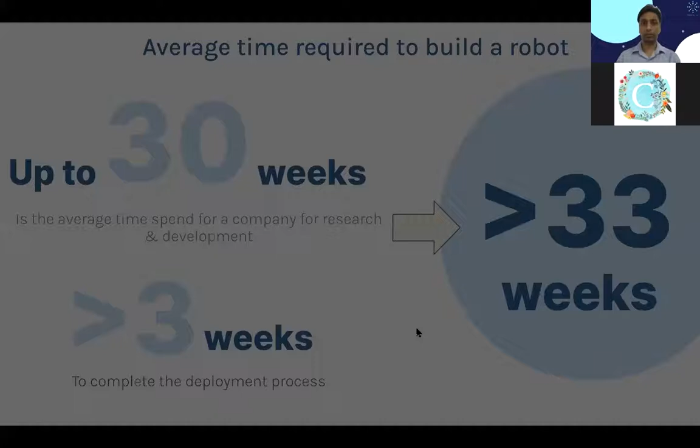Because of this, the adoption of robots by end users is quite low. So we analyzed what challenges these end users or robotic companies are facing, and why the

end users are reluctant to use robots. First, it's high downtime, which means when robotic companies go to the customer site to deploy these robots, they take up a lot of time doing the deployment or integration at the site, and their machines might be off. They might be in the middle of changing from manual to autonomous automation, and that takes a lot of time. Second is the cost of robots.

These days, service robots or industrial robots cost a quite significant amount initially, which is something a lot of companies are not willing to spend upfront.

Then, end users have difficulties operating these robots because the environment might change. They might have to call the robotic engineers to do the mapping again, to move the robot around again to build a new map. This again causes them a lot of trouble, because if the map has changed, they cannot use those robots during that time.

Then there are non-technical operators who, even if you give them training on how to do the mapping, are not able to use that. So suppose a janitor wants to use a robot for cleaning - their requirement would just be to press a button like start or stop, and the robot should do the task. So it has to be very friendly for them to use the system.

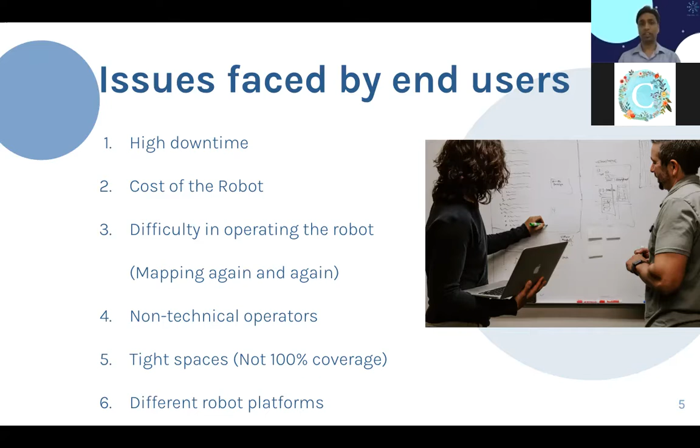Now, how do we address the issues which we just mentioned?

In order to reduce your downtime, make sure everything is tested in house, which means the team would have to spend a lot of time doing the testing in house. Even if your customer environment is different, make sure you are able to recreate some of that environment in your lab or office, so that you can do the testing there. That is one solution which one of the companies we know has adopted.

Then, instead of doing upfront selling, a lot of companies have adopted a monthly subscription cost. They have divided the cost of the robot into 24 months, and the customers have to pay for each month rather than paying it upfront. This removes the barrier to entry for a lot of robotic companies. This is something you guys can try as well.

Third is a user interface - robotic companies giving a user interface to the end users. End users can simply use this to control the robot, to do the mapping from the UI itself, or they can even have this UI for start and stop for non-technical operators. If you are doing these things, the barrier to entry would be reduced drastically.

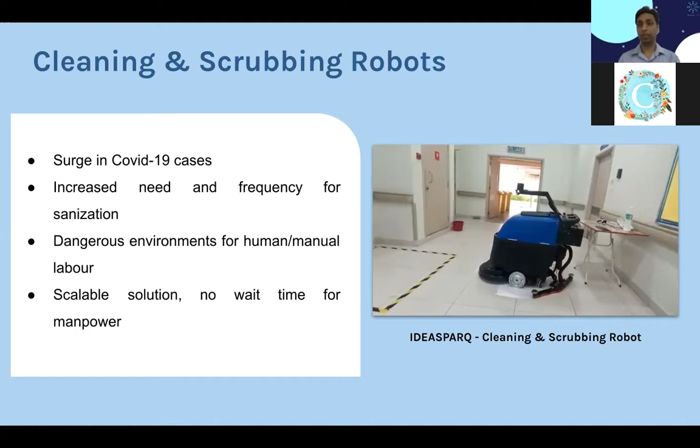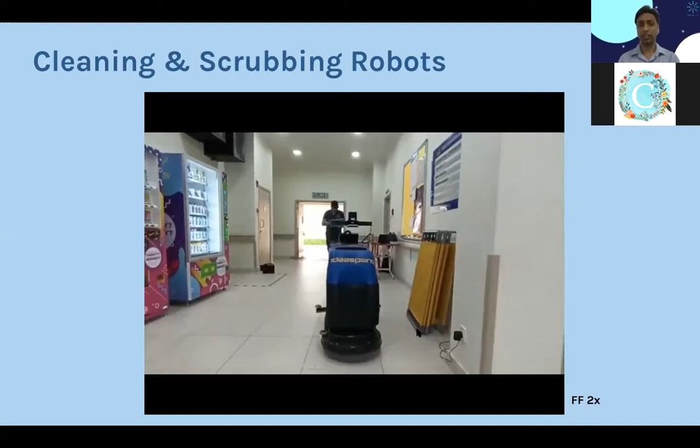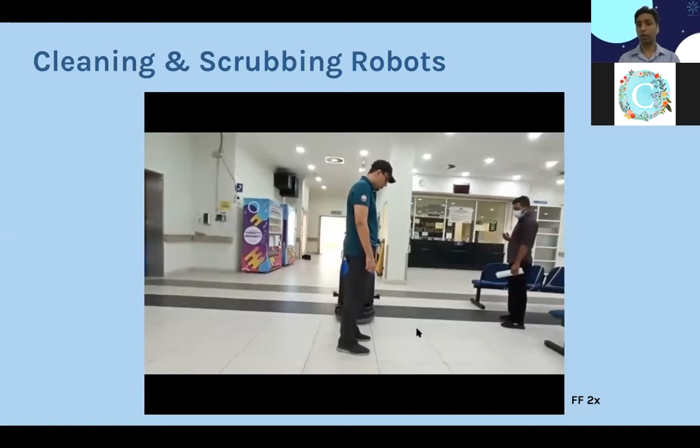The company gave their customer a very good user interface, and the downtime was very low because instead of 3 weeks, they were able to deploy these robots in 3 days. That speaks to why customers are more interested in buying their robots. This company is based in Kuala Lumpur, IDEASPARQ, and even if there are obstacles, the robot can avoid them autonomously and move around.

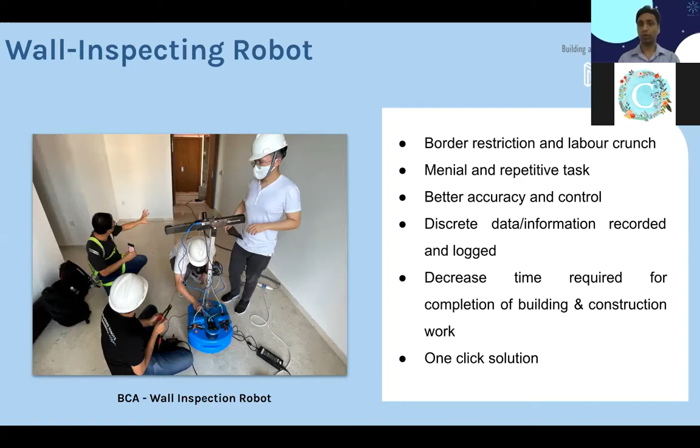Our next use case is for the BCA, the Building and Construction Authority of Singapore. They do inspection of a lot of sites once they have been completed. Because of restrictions, people couldn't go to the sites to inspect houses that had been completed, so they asked for a robot. These inspecting officers are not technical people at all - they just want a robot where you press a button, it starts, and it goes around the house.

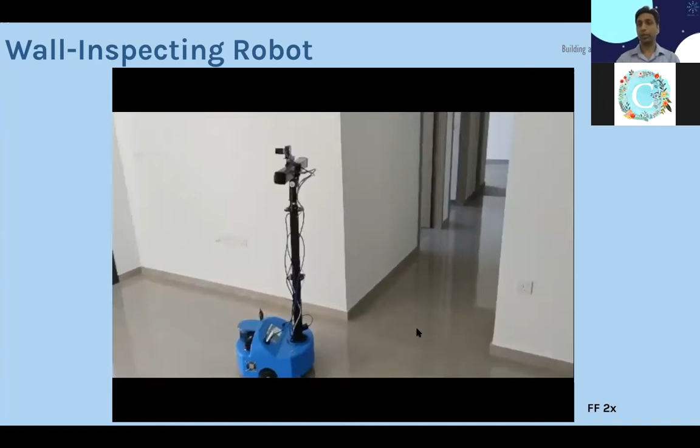It does the mapping by itself, and once the map of the house is built, you press a button called 'start inspection', and it starts inspecting the house. Once the inspection is finished, the inspecting officer can press a button saying 'generate report', and it will generate a report. This saves a huge amount of time - instead of having multiple inspecting officers visiting sites, you can have robots doing these things.

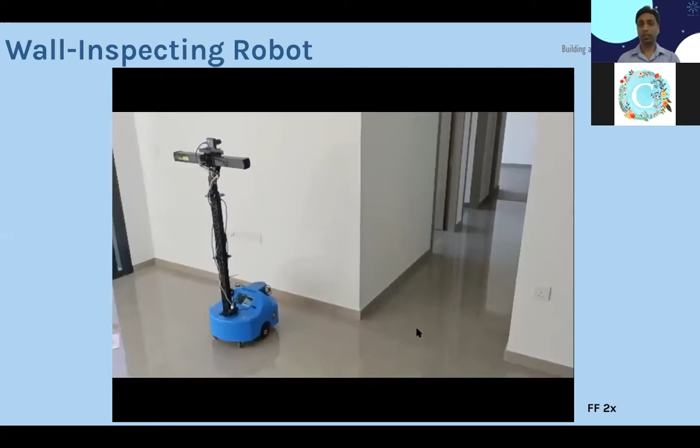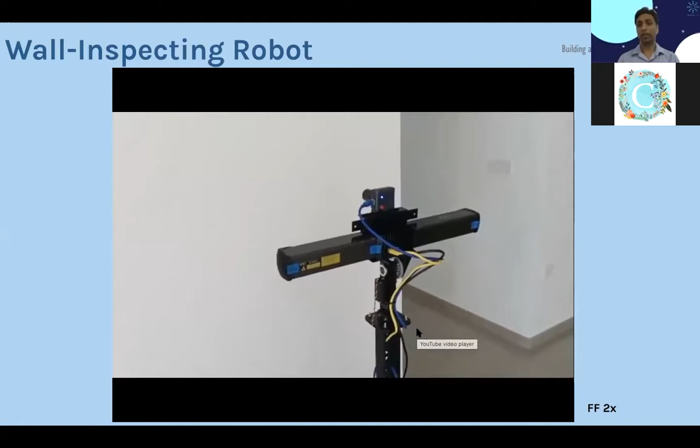The reason why the end user, BCA, adopted this solution was because it was so easy to use, with just a start and stop button. The barrier to market was reduced because of this simplification.

Another example is from a company we worked with that is based in Europe. Again, because of the increase in cases in different settings and outlets, they were using UV disinfectant robots. These disinfectant robots can kill coronavirus in the air.

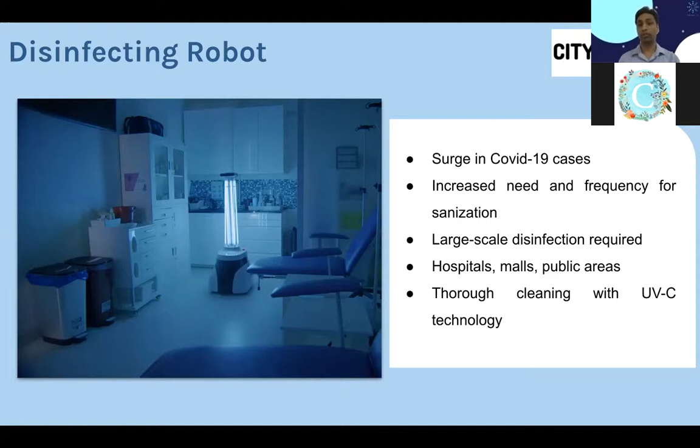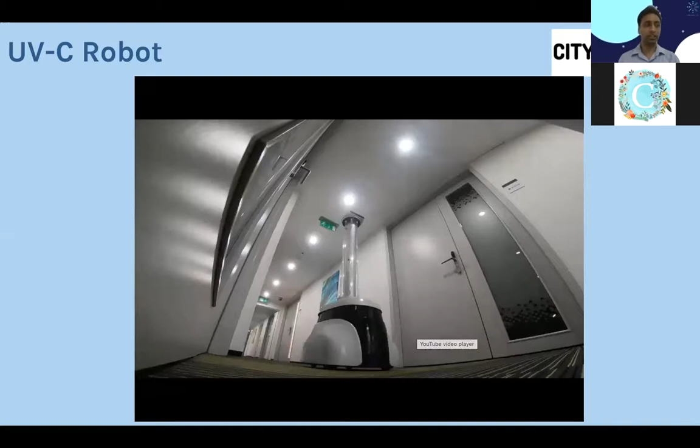They started making this robot and went to the customer to do the demonstration. Because of the user interface and ease of use of this robot, the customer was able to give them an order to purchase these robots immediately. They are able to do navigation by themselves, scanning, and disinfecting as quickly as possible - the user just has to press start and stop.

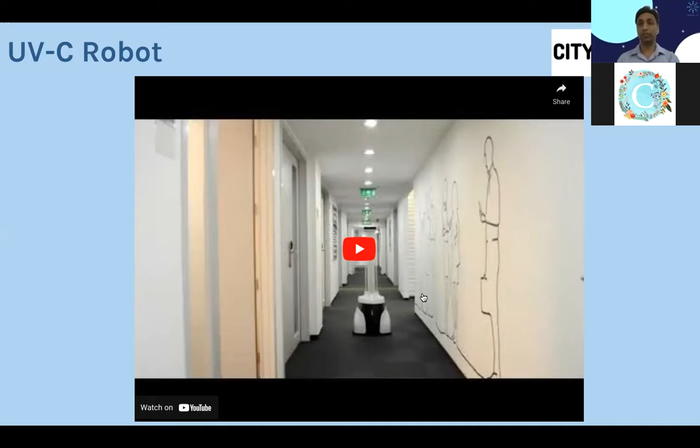Looking at all three cases, the most common factor was how they addressed the problem or the barrier to entry for these end users. Even though they had robots of different types, the common thing they did was address the needs of the users, making it easier for them to use rather than making the robot more sophisticated with many more capabilities.

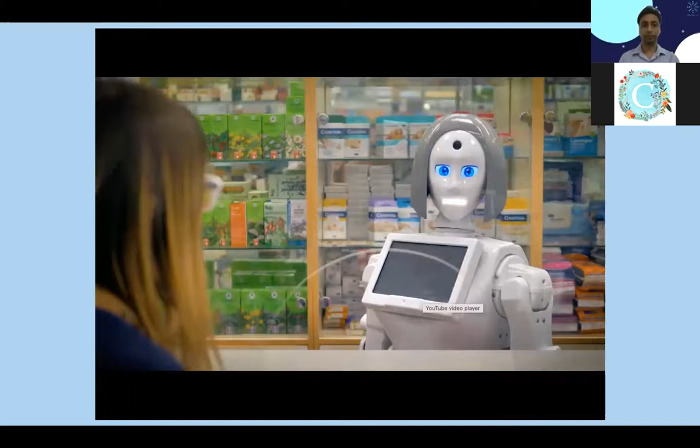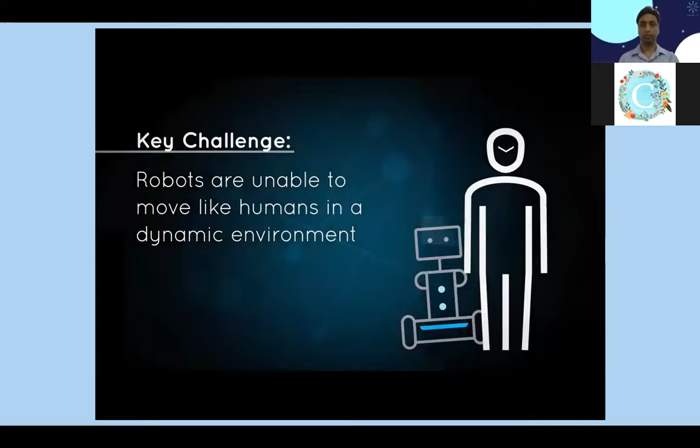Imagine a future life with robots helping humans in multiple tasks, such as bringing them medicines or even providing security. For this, the robots have to be robust, adaptable, and agile. One of the biggest challenges in the robotic industry is that robots are not able to move smoothly in a dynamically changing environment just like humans. The excitement to work on this challenge gave birth to Movel AI, which created AI-based navigation software that makes it more affordable and adaptable for end users.

Our flagship product is called Seirios, and it combines different data from different sensors, making it suitable to work with any robot in any environment.

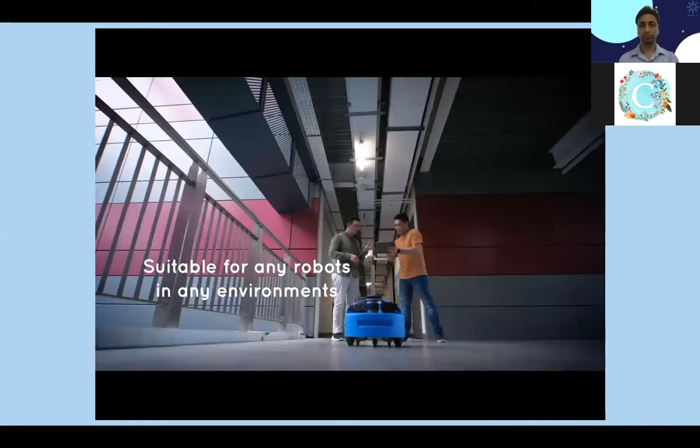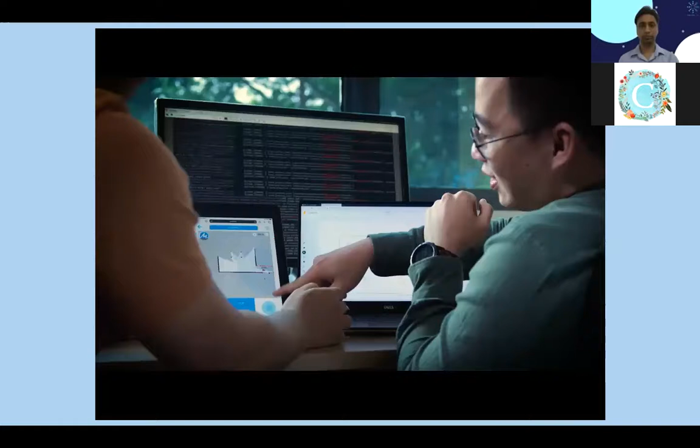It's okay if you have a limited budget, because our software makes your robot look like one with many sensors. We're serious. We give autonomous robots the ability to seamlessly integrate into industry automation through the use of machine learning and sensor fusion. We hope to improve autonomous robots by making them better, smarter through our agile products.

At the heart of Movel AI are the people. I personally believe that if I take care of the people, they will take care of the company. I like that everyone here has a collaborative mindset, and I'm glad to be able to influence the initial growth of this company. The great thing about working at Movel AI is that colleagues are really nice and warm, and the best thing is that management is really open to listening to suggestions and ideas, and that really makes it great to work at Movel AI.

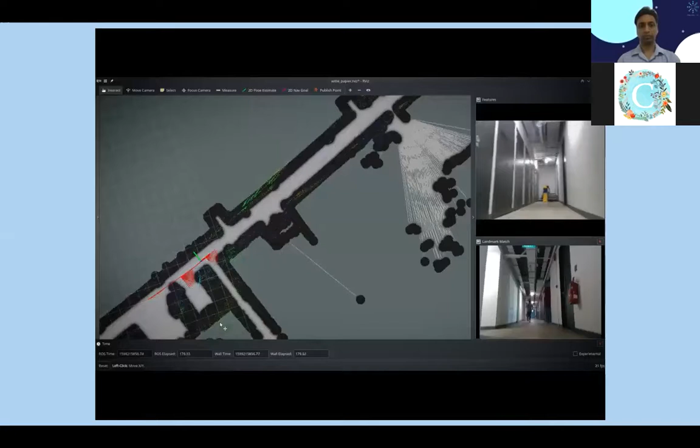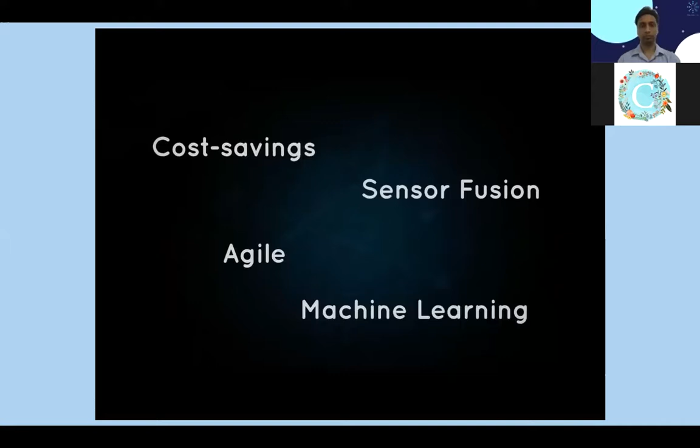AVTech decided to invest in Movel AI because of its powerful and intelligent software, which complements our direction to diversify into robotic solutions. The software excels in navigation and object avoidance in tight spaces, easy to use and deploy, and offers fleet management and analytics, making robots smarter over time. With our broad experience in multiple industries, speak to us today and find out how we can make your robots smarter and agile.

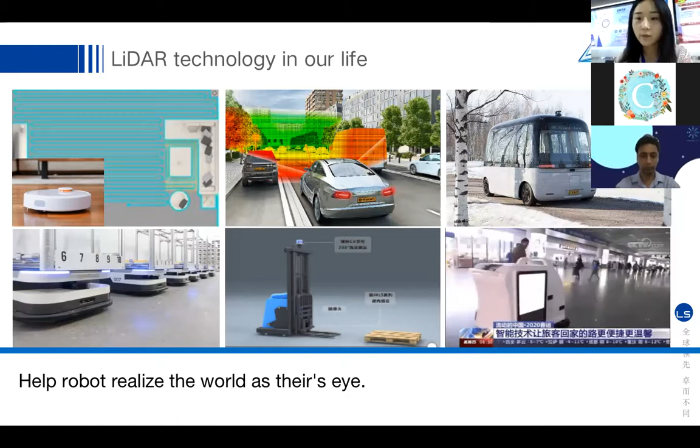From the LiDAR side, we can see that LiDAR technology is just around us in our life. You can see more and more autonomous machines, robotics, and autonomous vehicles growing fast. Like the cleaning robot, like Xiaomi, like the autonomous vehicle, the autonomous bus, the AGV, and the autonomous forklift, which work closely with our life.

So why LiDARs? For vision sensors, we also know about the camera and the LiDAR. The LiDAR can help robotics do map creation, path planning, navigation, and anti-collision. The advantages of LiDAR are about the parameters: it is more precise and easy to scan. It outputs data points, distance, angle, and reflectivity to help our engineers do the SLAM algorithm themselves. And it can adapt to different environments and work in day and night time.

As for the camera, the accuracy is around maybe 5 to 10 centimeters, and VSLAM is also very hard to do. It will cost a lot of time for the deployment of robotics navigation. And the camera cannot work well in the nighttime. So LiDAR technology is meaningful for robotics.

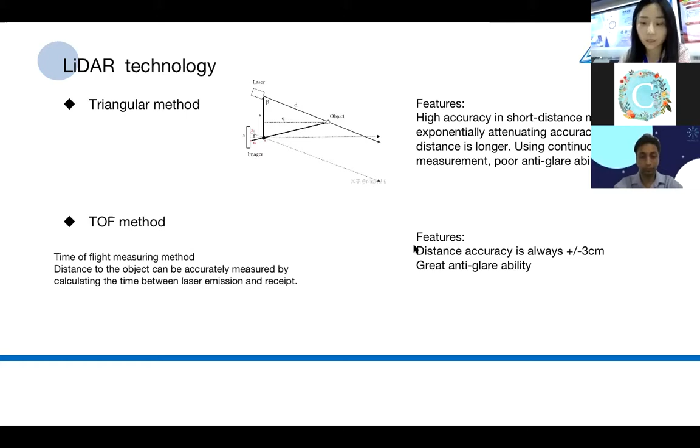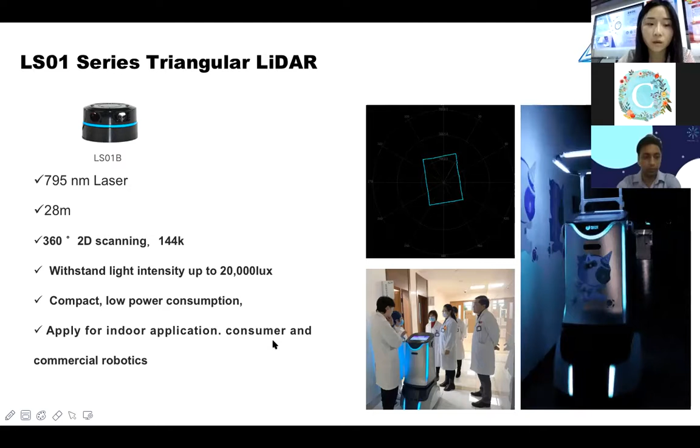This kind of LiDAR is compact with low power consumption, and it's usually applied for indoor applications, consumer and commercial robotics like to use it. The second one is popular in industry-level products, and most AGVs use this kind of product, because AGVs usually work in large square-meter factories, requiring a LiDAR with great IP level and stability quality.

And this kind of 2D Time-of-Flight LiDAR is a great option for AGV and industry products to use. It can work both indoors and outdoors.

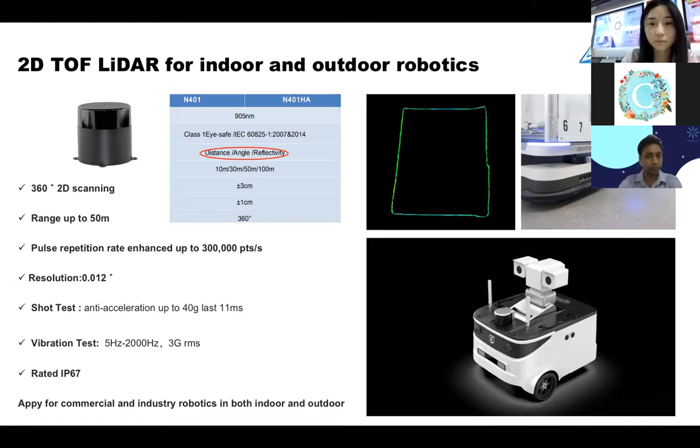And the second one is the new change in the selection of robotics. Maybe in earlier times, most autonomous forklifts used a 2D solution, like reflector solutions. But now they prefer to use the 3D SLAM solution for robotics or forklifts, because 3D SLAM can be applied to more complicated environments, which will also increase the safety level of their robotics.

And not only robotics, but autonomous vehicles, last mile delivery, and mapping systems usually use this kind of LiDAR.

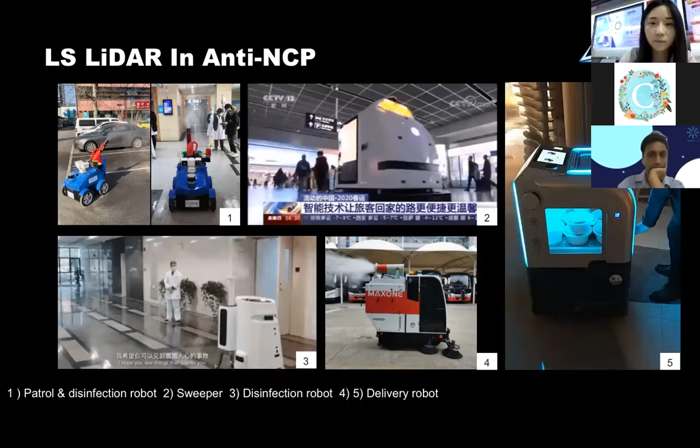Here we show some of our user cases, which include outdoor robotics, indoor robotics, and delivery bots. Most of them adopt the 3D LiDAR. This page is what we took from the media, and the media reported that this kind of robotics is working to fight against COVID-19, so it's doing something for humans.

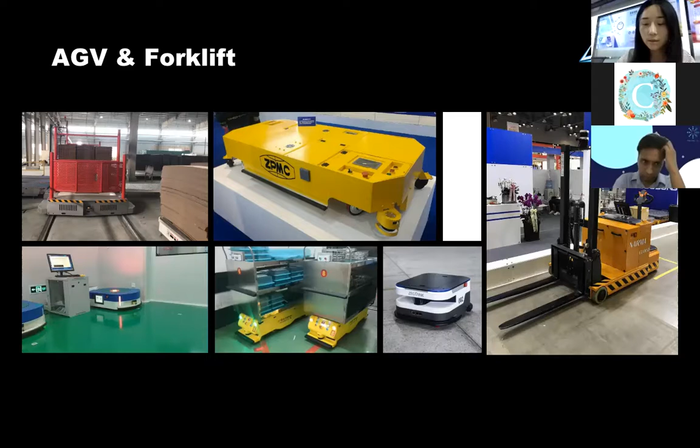As 3D SLAM can adapt to more environments, this is a new trend. And actually, we can see a lot of Chinese forklift companies have already done their R&D on this.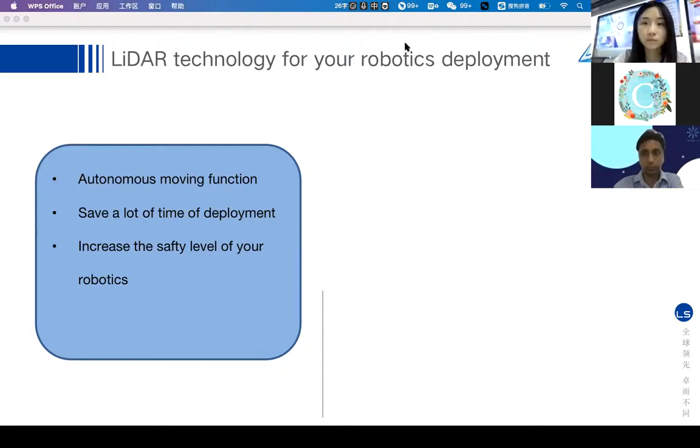So one of the questions asked is how the programming works and can adapt with the robots. Typically, when a robotic company is making a robot, there are different types of programming solutions and different programming levels to it. First is the firmware program, which is writing the device drivers for your motors, writing device drivers for your sensors, could be cameras or lidars, and then pushing these device drivers into a processor where we put ROS.

So ROS is Robotic Operating System. It is running on Ubuntu. Basically, you have a PC or an industrial system on the robot which is running Ubuntu. That Ubuntu is running ROS, and on the ROS you publish this sensor data, and you even publish the motor driver and encoder data.

And that is where, in ROS, you write scripts to control the motors of the robot from the data you are receiving from the LiDARs or the sensors. This script could be written in Python - normally it's written in Python - or either C++, which you can compile over there.